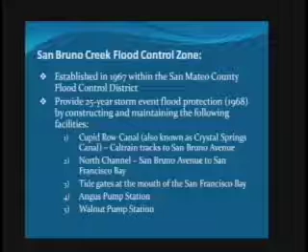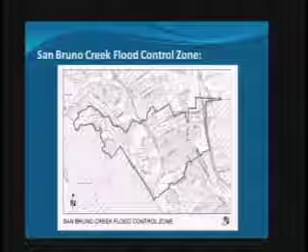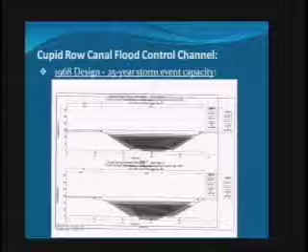This is a picture of the zone. You can see it encompasses primarily the city of San Bruno, though there is a portion of South San Francisco in this zone. This is a little confusing, but what you want to take from this picture is that this is the design for the 25-year storm. The wider channel is the actual design cross-section that was built in 1968, and what we've been trying to maintain over the years.

The zone receives funding from a portion of the 1% property tax. It was created prior to Prop 13, and the revenue we receive is a portion of that 1%, about $195,000 per year. In the last 10 years, we've spent about $90,000 on maintenance, leaving roughly $100,000 a year that we're saving up for capital projects, which, as you'll see, are very expensive for this type of work.

The last time we did a major dredging project, it was roughly $500,000. The cost of that is primarily the permitting and biological work we do because of the presence of the San Francisco garter snake and the red-legged frog in that channel.

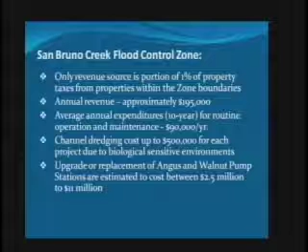We've also looked at upgrading the two pump stations, the Angus and the Walnut pump station. For us to upgrade both of those stations, we're looking at about $2.5 million. And to replace those stations, we're in the range of $11 million. So as you can see, the cost of capital versus the revenue is disproportionate. There's a lot more capital needs than we have the dollars for.

As I mentioned earlier, we do have a sensitive habitat that we're working in. This entire channel is within what's called the West of Bayshore property, actually owned by the San Francisco International Airport. The city and county of San Francisco owns that land. Somewhere along the line, we inherited that channel without an easement. So we're hoping to get an easement someday, but technically this all belongs to the city and county of San Francisco. And as I mentioned, the channel runs east-west and then north-south up to the bay.

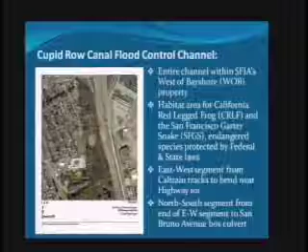This is really the meat of what we want to talk about. Prior to 2000, maintenance for us was fairly easy. We would go in annually or as needed, come in with heavy equipment, and take out the sediment and the vegetation. We'd also maintain the access road.

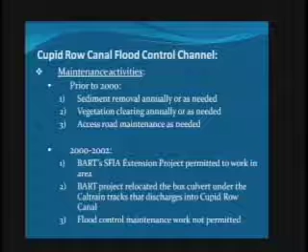Right about the 2000, 2002 timeframe, BART came in and extended their tracks down to Millbrae. When that project came in, everything changed. The channel that went from San Bruno was realigned under and through the BART tracks to get to the east-west segment. But what really occurred at that time was a higher awareness of the endangered species in that area. We weren't allowed to do any maintenance in that area between 2000 and 2002.

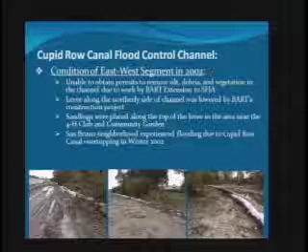This is an example of the maintenance road that was affected by the BART construction. We say in our slide that it was lowered. The lowering was actually done by the heavy equipment that was placed out there, and we couldn't get out there to maintain it. So sandbags were placed along the edge of the channel, and in 2002 we had some overtopping at that time.

After BART left, we applied for maintenance permits, and now we're in a new regulatory environment. We're able to get one-time permits to clear vegetation and sediment. When we did that in 2003, that cost us about $535,000. And as I said, the primary cost is our biologists.

When we go in there and work, we're either hand-cutting vegetation or, when we dig out sediment, we have a biologist standing next to the excavator, looking at that bucket, looking at it go in the truck, making sure there's no frogs or snakes in there. As you can imagine, the labor costs on these jobs get pretty expensive.

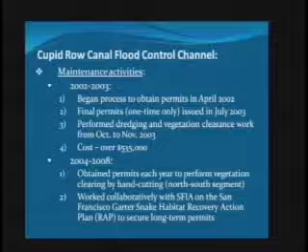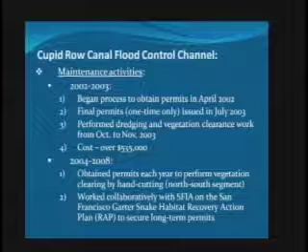After that, from 2004 to 2008, we received permits to go in and hand cut. And then we began working with the San Francisco International Airport to look at how we can work in this area but still maintain the habitat for the red-legged frog and the San Francisco garter snake. So we're constantly facing this battle of trying to preserve the habitat for these species while trying to maintain flood control.

And what came out of those discussions was that the airport developed what's called a recovery action plan. The purpose of the recovery action plan was to increase the population of the garter snake as well as the red-legged frog. The intent was to increase those populations so that when they're thriving, we will be more likely to be able to get in and do the work that we need because those populations are less affected.

As you can see, we're dealing with several different agencies when we get permitting. And at times, these agencies have different comments on their permits that are sometimes in opposition to those given by other agencies. So it becomes a little bit difficult to work sometimes. But this plan was approved in 2008, and it's to be implemented in 3 phases.

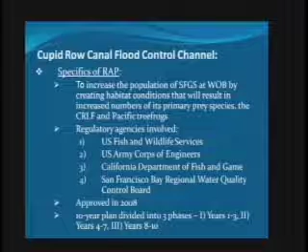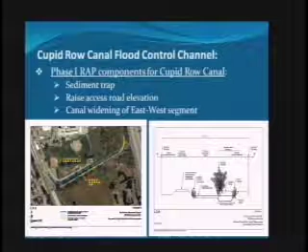So a big portion of this plan, the phase 1 plan, was to deal with the east-west part of the channel. And what the RAP suggested was to cut out scalloped areas, or widen the channel in certain areas, to provide a wet habitat so the frogs and snakes can breed and flourish in those areas. So that RAP construction was implemented in 2008.

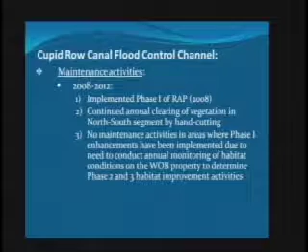During that period, we continued to work on the north-south channel by hand-cutting vegetation. But one of the conditions of that permit for the RAP was that we could do no maintenance in the east-west segment. So as you can imagine, vegetation began to flourish in that area.

I'm going to go through a series of slides that shows exactly what happened. On the left side, you'll see the condition of the channel in 2008, and I apologize for the shadows, but that's all we've got. On the right side, you'll see the condition of the channel in 2009, and you can see those scallops carved out of there.

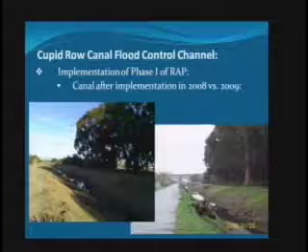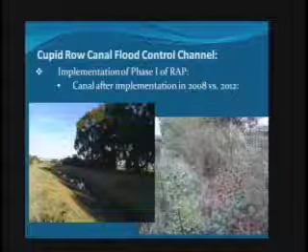Fast forward to December 2nd, 2012, we had a series of storms that went through from Wednesday through Sunday, and there was a significant amount of water that dumped during that period. We've checked and found that there was roughly 3.7 inches of rain that fell during that roughly 5-day period. And what happened was we had some overtopping of that channel.

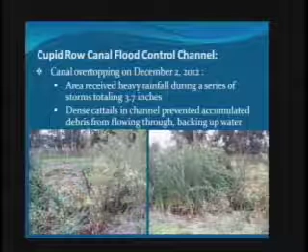The overtopping, from what we can tell, occurred because of the dense cattails right next to the area where it overtopped. The flow came down that channel, debris and water hit those cattails, and it overtopped at that location. So that is the reason why that happened.

Now, what we've done since then is work collaboratively with San Francisco International Airport to try to get some emergency permits to get in there. We are attempting to get permits from Fish and Wildlife, a federal agency, and Fish and Game, a state agency, to go in there within the next week or two and cut down those cattails so that we don't have that obstruction.

I learned today that one of the two agencies has approved our emergency permit to go in. We haven't heard from the other agency yet, but we are going to attempt to get in there, hopefully this weekend. We're going to continue to push the other agency to try to get in there.

Phase 2 of the RAP is going to involve continuing this along the north-south segment of this channel. But what we're going to try to suggest and get approval for in this Phase 2 part of the project is to be able to do sediment removal on that east-west segment along with vegetation removal.

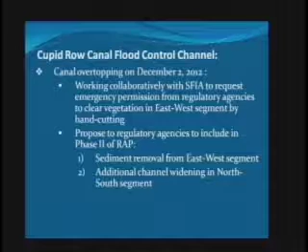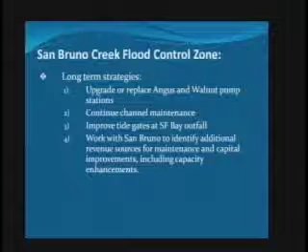In terms of long-term for this channel, as I mentioned, it is a very difficult area to work. We have very little revenues, and we've got a tough regulatory environment. And we've got a channel that was designed for a 25-year storm, which over the years we've seen more often. So what we need to do in the future is upgrade both of our pump stations to continue the channel maintenance in that area.

We also need to upgrade the tide gates out at San Francisco Bay to keep saltwater intrusion from working its way in. And I think most importantly, we'd like to work with your city and your staff to identify additional revenue sources so that we can make these capital projects happen.

The portion of the 1% that we're getting is simply inadequate to do some of the work that we need to do. So over the long term, we're going to need to look at various other methods of getting revenue, and there are several options available. We operate another flood control district where we've done some bonding. They have a larger revenue stream, but we can talk about that in the future.

And that really concludes my presentation. I'd be happy to answer any questions you might have.

Council have any questions of Mr. Porter? Mr. Rico? I just had one question. Could you maybe explain a little bit? Right into the mic, Mr. Rico. Thank you. Robert Rico, 7th Avenue.

Could you explain a little bit about the tide gates and how they are affected by high and low tides? And does that restrict water under certain conditions from flowing into the bay and therefore backing up?

Thank you. Sure, in addressing that question, the purpose of the tide gates is to inhibit salt water, essentially the bay, from getting into the channel during high tides. But the flap gates open when there's a high flow, so the way they're designed is when you get pressure from the water coming from the channel, it'll open the tide gates and the water will flow in. When you have low flow situations but a high tide, it keeps the water from going up into the channel.

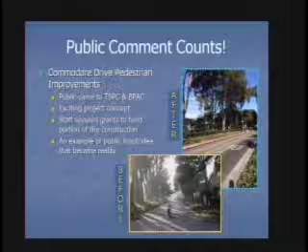In 2008, one of the first things - I wasn't chairman yet, I was just sitting on the committee - one of the workers near Commodore Drive came with a petition, and she had gotten a number of people to sign it to tell us how bad the area was. From an advisory standpoint, we knew we were limited and didn't know how much funds staff had, so we told her to go to the bicycle committee, because they might be able to get a grant to actually do the work. It took a few years, but it's done, and it's so much better. You can walk from the BART station now all the way to Bay Hill - before you were walking on the street. This is one of the areas where the public came to us, we listened, pointed them in the right direction, and it got done. That's really neat, seeing your work in action.

So 2013 going forward, we're going to keep focusing on the same thing: parking restrictions, stop signs, traffic calming. The nice thing staff does is put together a list for us of everything on our agenda. So every time we come to the meeting, we know if an item's been on there for a long time, what's going on with it, what we're waiting for. We have an idea almost every month what we're going to be doing and what else we could be doing. We have 5 pending traffic calming items in the queue - we've been working on other things, so hopefully within 6 months we'll clean it up, and then when new requests come in, we can address them.